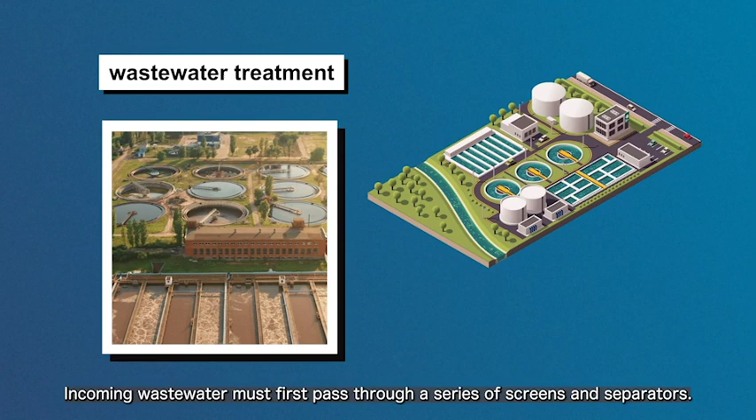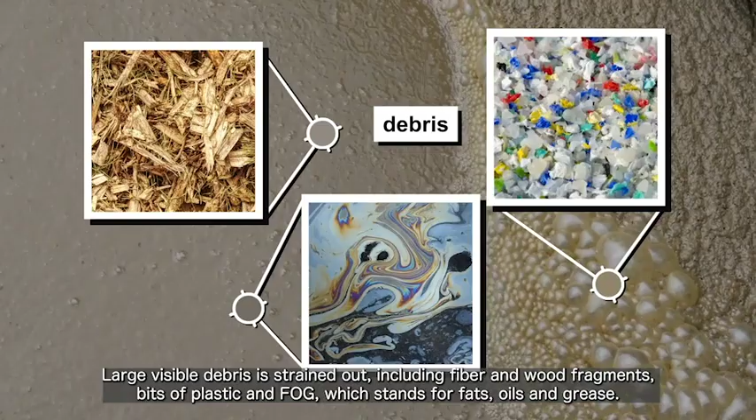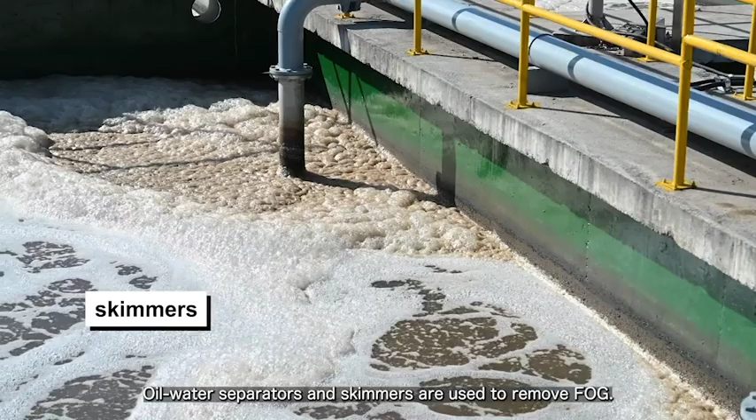Let's take a tour of the wastewater treatment process. Incoming wastewater must first pass through a series of screens and separators. Large visible debris is strained out, including fiber and wood fragments, bits of plastic and FOG, which stands for fats, oils, and grease. These oily substances are lighter than water and naturally float. Oil-water separators and skimmers are used to remove FOG.

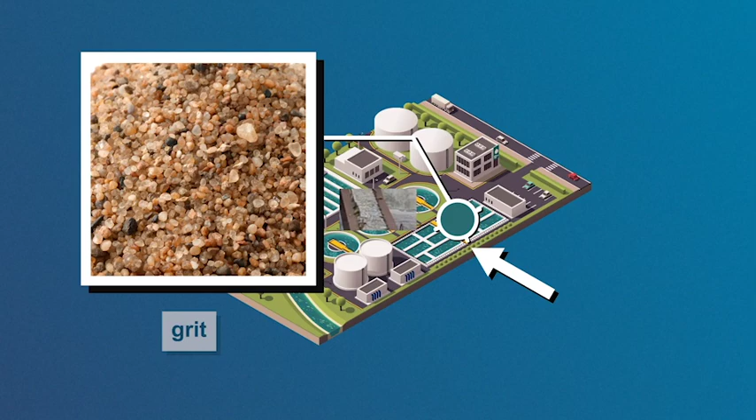Finer screens remove smaller particles of grit, such as dirt and sand. All the removed waste material is washed and compressed. Then it is discarded as landfill.

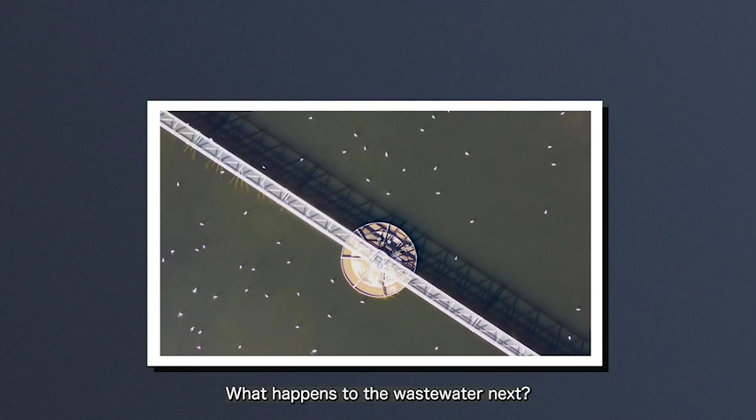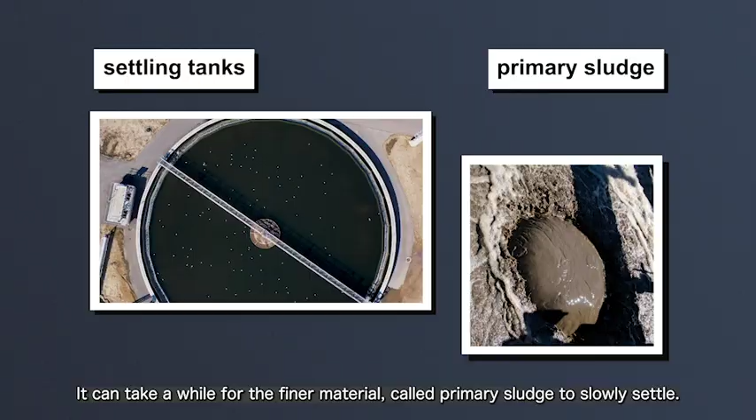What happens to the wastewater next? It is sent to large round settling tanks to separate the remaining solids from the liquid. It can take a while for the finer material, called primary sludge, to slowly settle. This sludge is eventually pumped from the bottom of the tank to another area for sludge thickening, the removal of excess water. These solids go to the sludge digester.

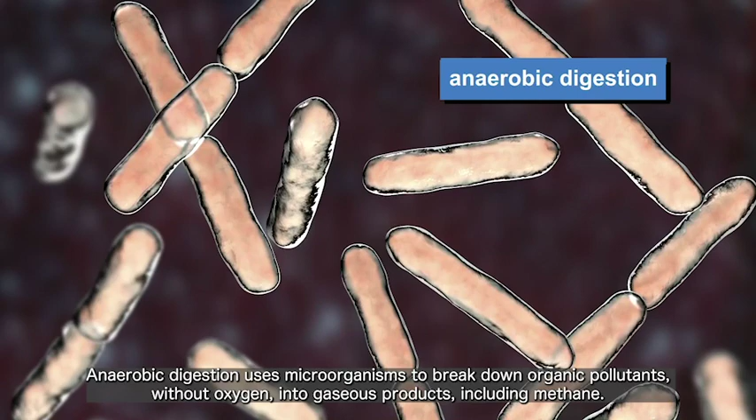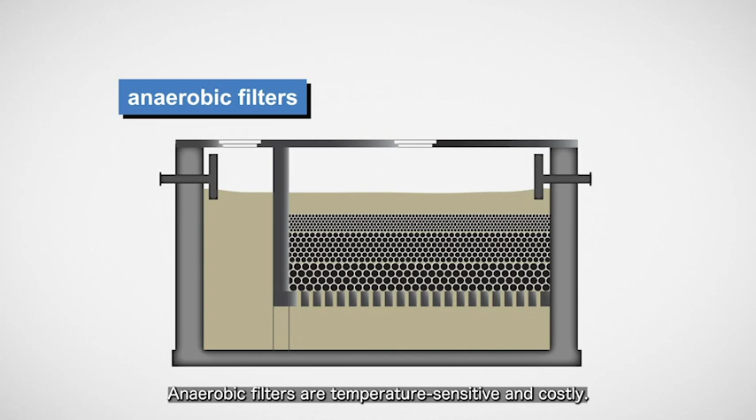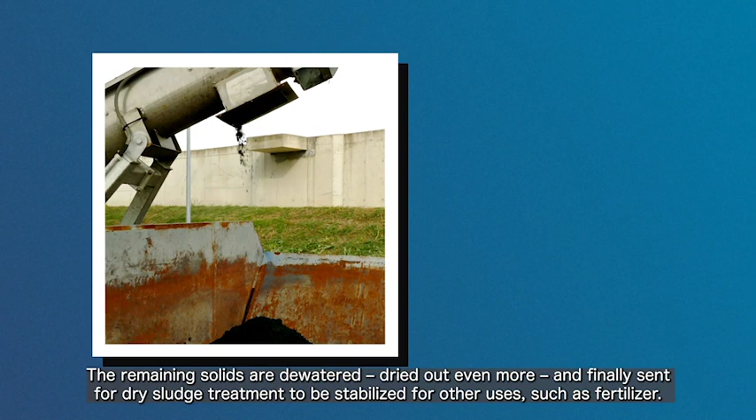Anaerobic digestion uses microorganisms to break down organic pollutants without oxygen into gaseous products, including methane. Anaerobic filters are temperature sensitive and costly, but the methane can be used to generate heat and electric power, offsetting some of the cost. The remaining solids are dewatered, dried out even more, and finally sent for dry sludge treatment to be stabilized for other uses, such as fertilizer.

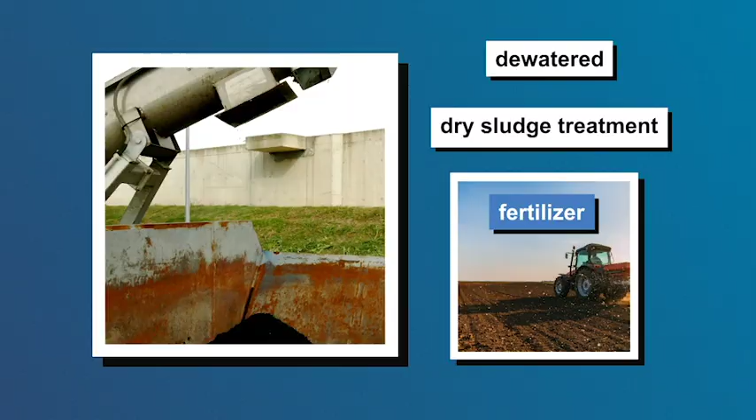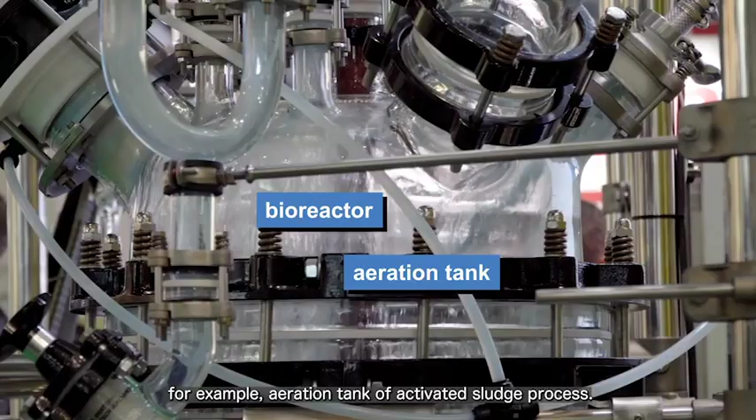Meanwhile, the wastewater from the settling tanks and the water removed from the sludge flows into a specially designed bioreactor. For example, an aeration tank of activated sludge process. This is where most of the water treatment happens. Air is supplied so that microorganisms in the wastewater can biodegrade the remaining pollutants aerobically.

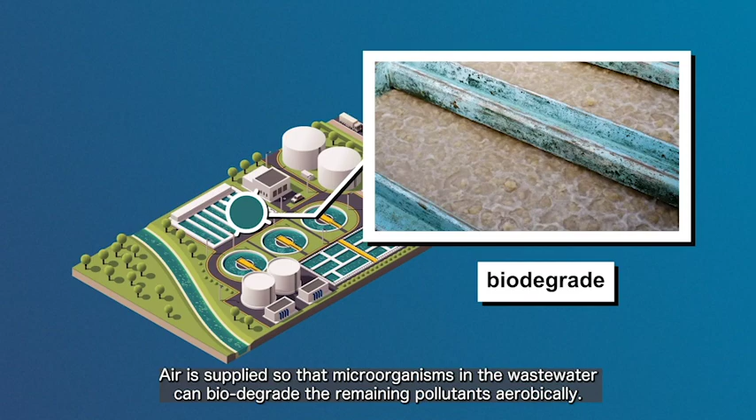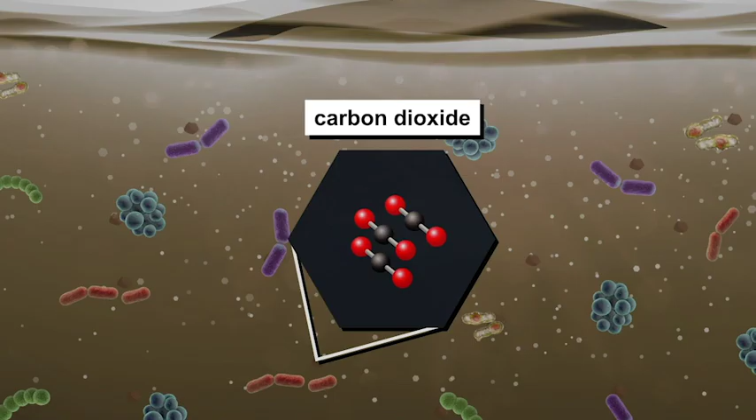Bacteria break down the organic matter, which contains carbon, to form carbon dioxide and water. This is similar to what occurs in nature at the bottom of lakes and rivers, but that process takes much longer.

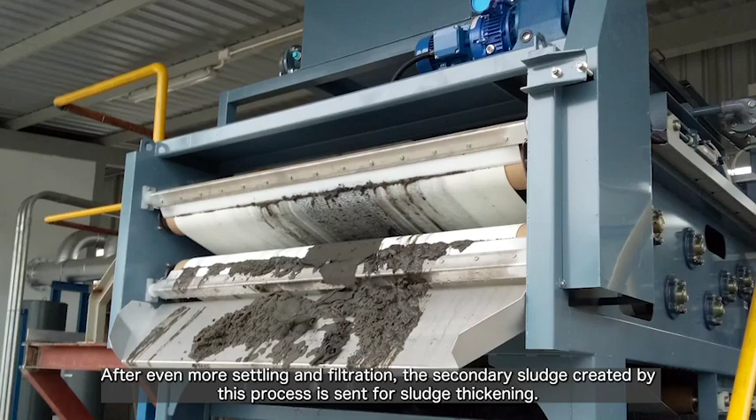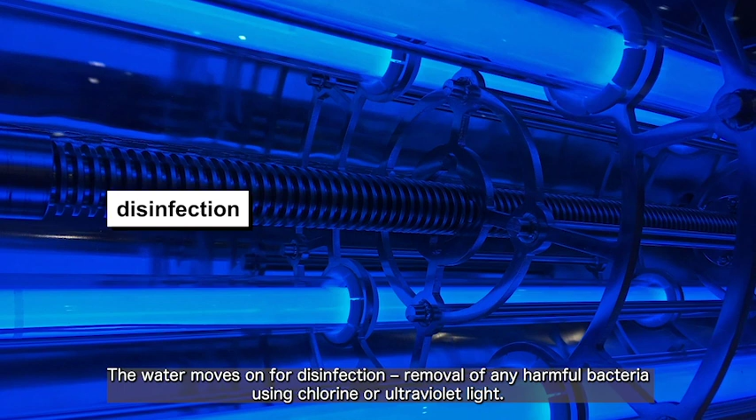After even more settling and filtration, the secondary sludge created by this process is sent for sludge thickening. The water moves on for disinfection, removal of any harmful bacteria using chlorine or ultraviolet light. The clean water is then ready to be reused or discharged into the environment.

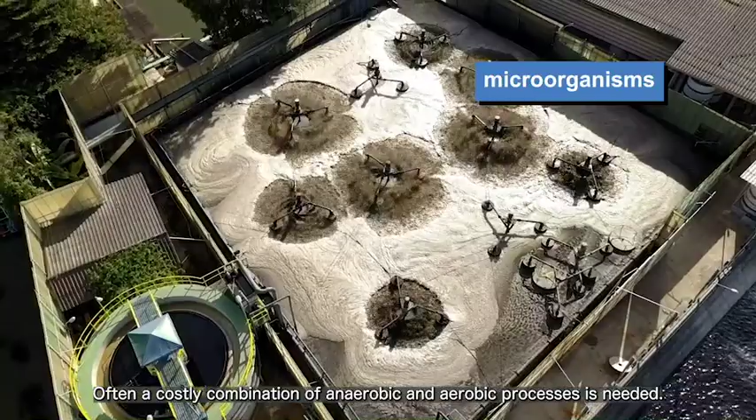You can see how the wastewater treatment process relies on microorganisms at key stages. Often a costly combination of anaerobic and aerobic processes is needed. How can we minimize the cost of using microbes to treat wastewater?